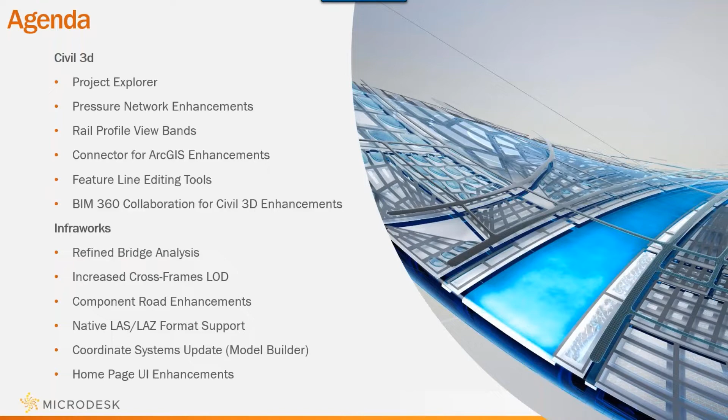Let's start by taking a look at some of the new features and enhancements that have been added to Civil 3D.

The first one is the addition of Project Explorer. This is a new tool that was added and is currently available to all AEC Collection license owners. It allows you to view, manage, and edit your entire design in one cohesive window, making things very fast and easy, and allowing you to do things quickly that were very time consuming in the past. This makes navigating the data much easier.

So let's go ahead and take a look at the Project Explorer.

I have a standard simple file I've put together which contains a decent amount of data. There are some surfaces, some alignments, some corridors, things like that. I've also created this same model in InfraWorks, so as we look at some of these tools, we'll start getting familiar with this same project location.

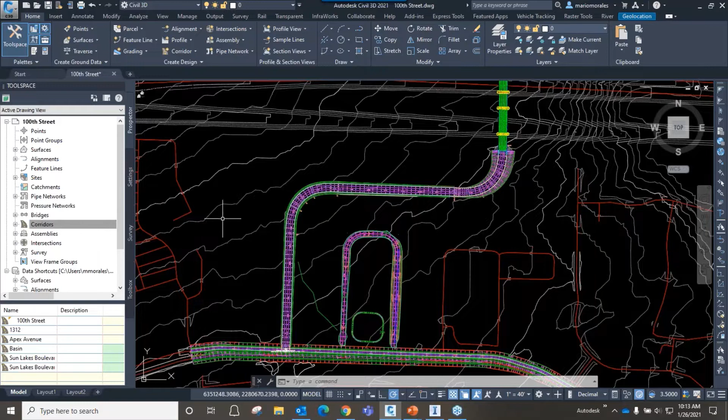To access the Project Explorer, you would go over to your Add-ins ribbon tab, and you'll find Project Explorer up here.

In here, there's quite a bit you can do, and you'll see that there are several tabs along the top of the window, and this is all completely customizable. You can go in and adjust your layout to choose the features you want to see and how you'd like to see them. Currently, I'm on the Alignments tab.

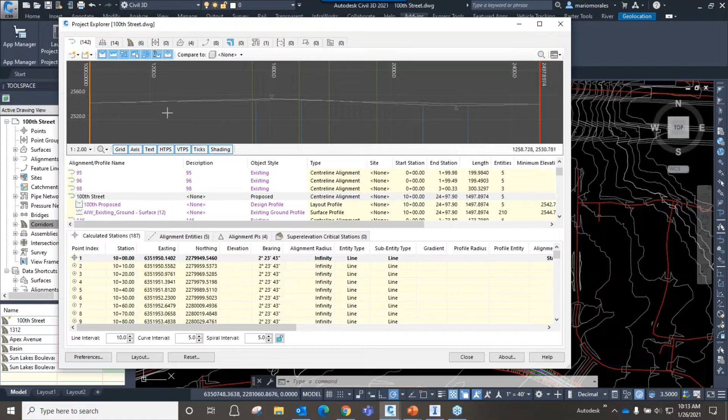As I sift through my alignment list, it will populate those alignments and show you horizontally and vertically. So when it talks about alignments, it's also talking about profiles.

You can control the features you're going to see in the window. I'm currently looking at this profile here. I can adjust my vertical exaggeration if it helps. I can also compare that alignment to other alignments in the file, doing profile overlays, if you will.

And I can quickly work my way through the various designs. There are tabs for lots of different categories.

I've also got some assemblies in this file. You can see those listed here. As you work through these, you'll start noticing the various properties that are available to you, so you can get to all the sub-assemblies and the properties that have been defined on those. As you can see, I've got lanes and sidewalks and things like that.

I can adjust property values without having to click each individual piece in my model space. This makes it really easy and convenient to get to all of these, change the code sets that have been assigned to it, the assembly types. If you want to change them to a rail or undefined, things like that, you can very quickly and easily make all those changes.

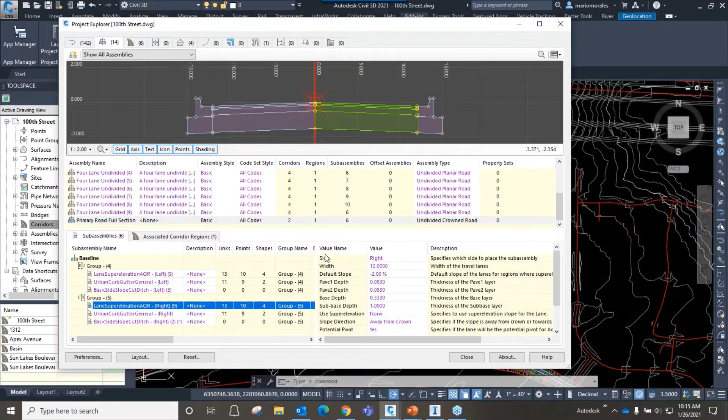When I switch over to corridors, again you'll see the corridors that are available to me here as well. I can adjust vertical exaggerations. You can navigate in these windows just as you do with your standard Civil 3D.

I can also come through and pick specific stations or work my way through the stations. I can turn on surfacing and compare the surfaces at any given location.

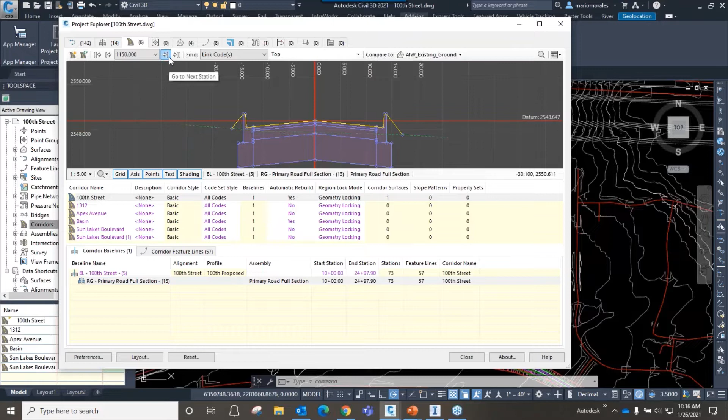All of this we see is completely customizable in the preferences, so I can go in and start adjusting vertical exaggeration, grid spacing, colors, things like that. There are lots of really cool things we can do in here that we can adjust and change. I don't have any point groups, but we also have support for those.

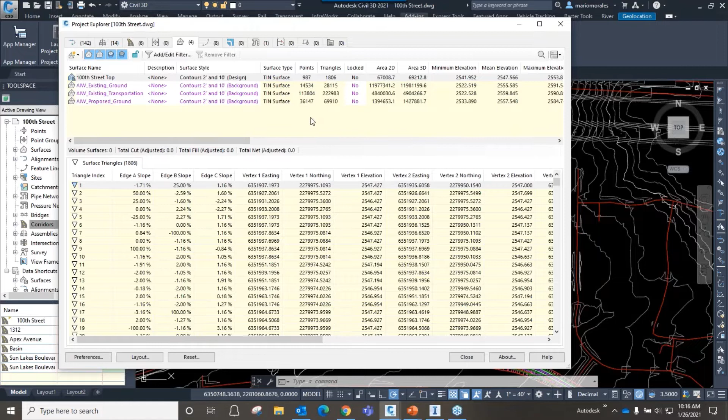And then we also have surfaces—you'll see all of the triangulation information and everything else. There's feature line support too, so you can run through the various feature lines that are in your file.

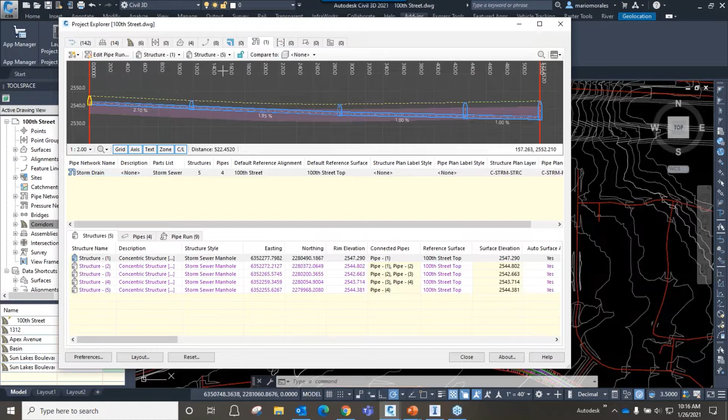I don't have any parcels in this file, but there's support for that as well. And then pipe networks—you can see I've got pipe networks here. I can look through the network however I see fit. I'm currently looking at this very small network from structure 1 to structure 5, but I can choose what I'd like to see.

I can even edit the design here too. All of these buttons along the top have the ability to create as well, so this window can actually remain open. You can put it on a separate monitor, or you can work in your file. For example, I can come in and choose to create a new pipe network or create one from an object.

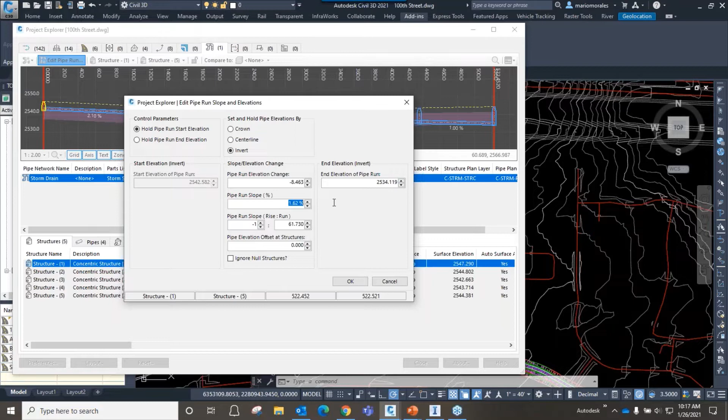Those tools are available on all those tabs. I can also choose to edit this pipe run. So if I went over and said edit pipe run, I can pull up all the information on this. Say, for example, I wanted the entire pipe run to be at 1%. I can do that, choose OK, and update the entire pipe network at one time without having to go in, select a pipe, open up the network editing tools, and then edit each pipe individually.

Again, I can come in and lock things, and I can compare them to surfacing. So lots of great features we can do in here.

We also have support for sample lines and AutoCAD blocks. And then the last tab is for your object sets.

In your object sets, I'll just make a quick one really fast. Let's say we're going to make one for the storm drain. You can choose what this object set does. It can generate reports of all different types: text, CSVs, HTMLs, PDFs. And then down at the bottom, you'll also notice I can create drawing files or tables in model space or paper space. So very quick and easy.

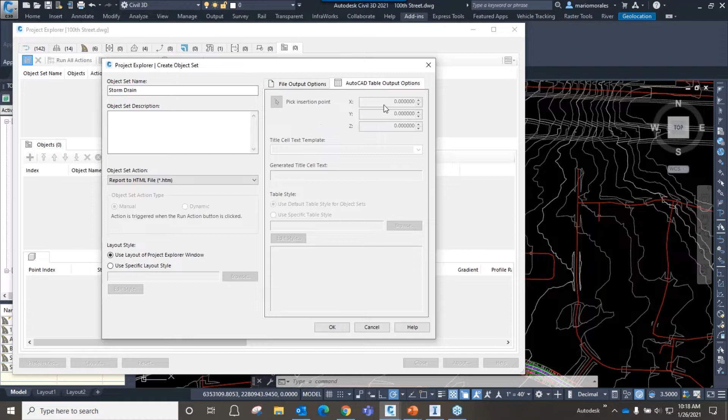So let's just say this is going to be an HTML report. It's giving me the options of how to format and set up the look, style, fonts, things like that for this report. If I was doing a table-based one, then I could pick my insertion points and things like that. I'll go ahead and choose OK.

Now this set has been created, and now I can just add what I want into this. For example, if I wanted to come in and add the storm drain, all that information is in there. So very quick and easy to do so.

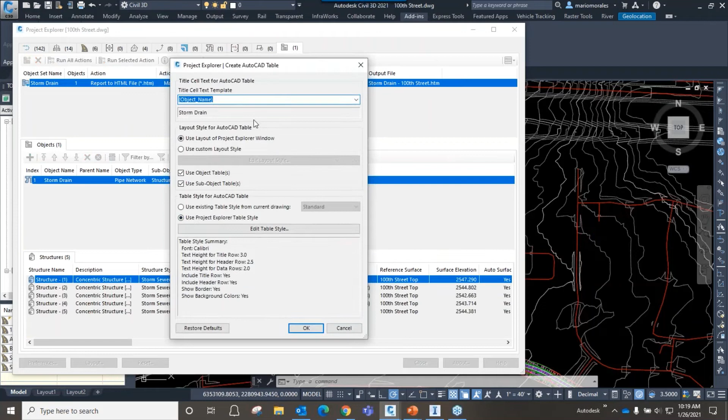Again, if I wanted to, I could also come in, and even though I did it as a report, I can still say generate a table. Go ahead and call this storm drain as well. I'll leave the default fonts and heights and styles just as they are. Choose OK.

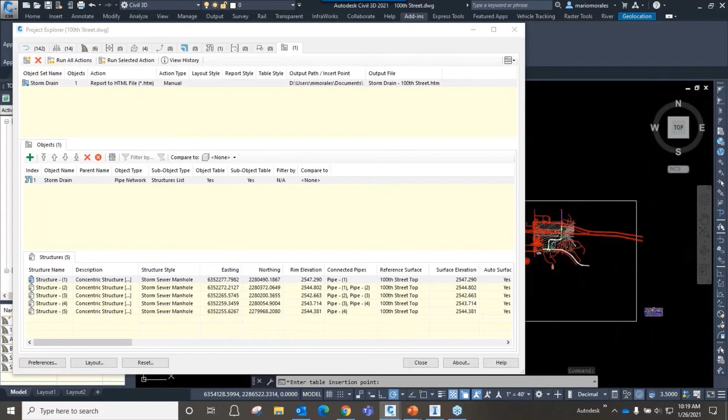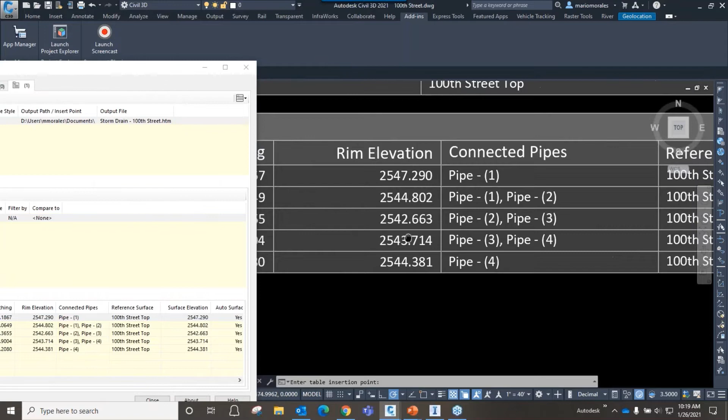If you look down below, you can see my application is still interactive with me. It's asking for a location for this table. I can just go out and place it somewhere off to the side. You can see how it's generated this. I had it put in all the information, so I'm getting a little bit of everything, a little overkill, but you kind of get the gist of that.

The nice thing about these is they're all dynamic, whether they're in model space or paper space or whatever, it doesn't matter. If your design changes, the tables will update as well. So definitely a nice little tool that we've seen, and it's made things a lot easier to access the various information.

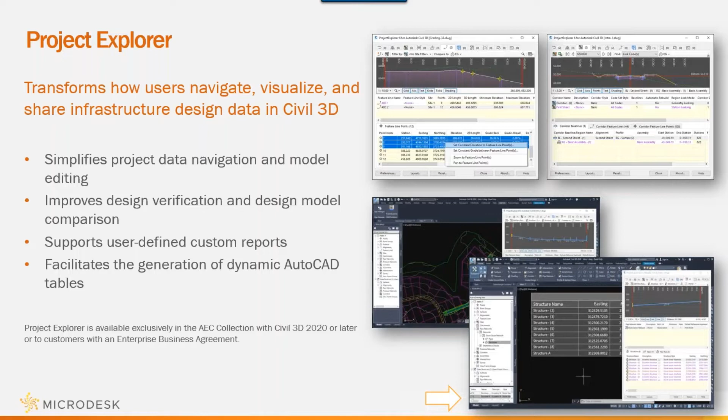Pressure pipe networks have had quite a few updates as well, including the new snap to pipe intelligence. This allows you to just click on a pipe as you're creating a new pipe run, and it will automatically determine the tee sizes that are needed and pick that from the catalog and place it for you without you having to choose it from the drop-down list.

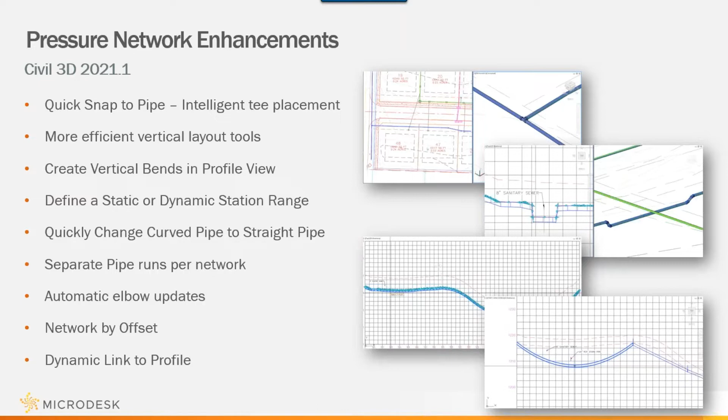We also have new enhancements to the vertical layouts, the new vertical bends in profiles, as well as creating dynamic station and static station ranges. Quickly converting pipes from straight to curve and back again, creating separate pipe runs per line, which is really nice, all within the same network. Automatic elbow updates, so as you click and drag a pipe network in your model space, it will automatically figure out which pipe fitting needs to be put in place and switch those out for you. Also automatic network offset creation and dynamic linking to the profile.

When we're working now with the tools, you'll see there's been some enhancements to the compass that was previously in there. It definitely makes life a lot easier and more functional to get those exact fittings you need. As you start drawing, if you snap over a pipe, it will automatically calculate the sizes of the tees and bends.

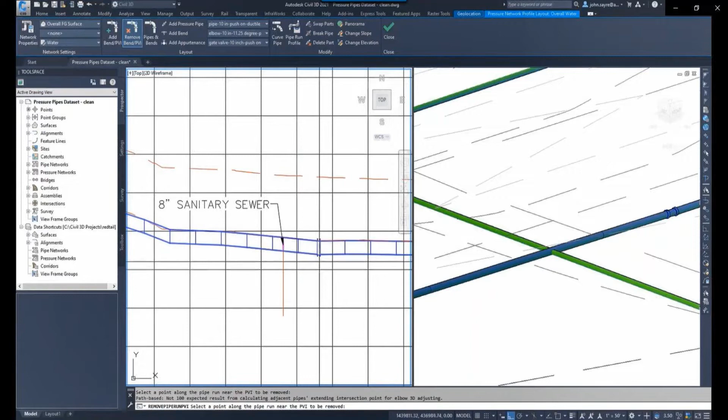You can also now add bends to the profile view very easily by just clicking, and wherever you click it will place the bend you need. Then you can alter your design, and as you move things around, it will figure out what vertical elbow is required for the change you've made and automatically swap that out, so your design updates quickly and easily. You can also click and move them around, or click and delete them just as fast. It's really intuitive and saves a lot of steps in modifying your design.

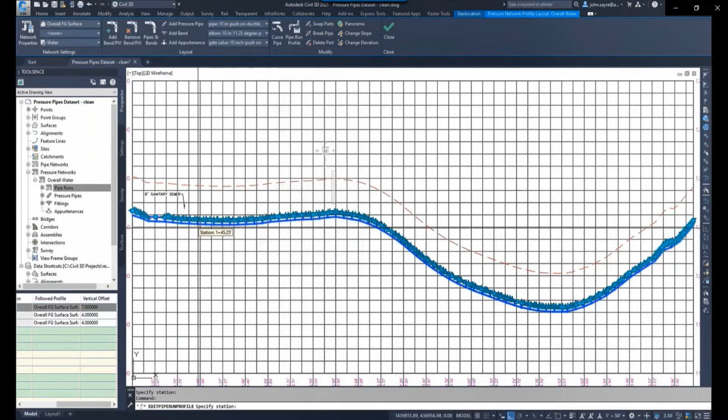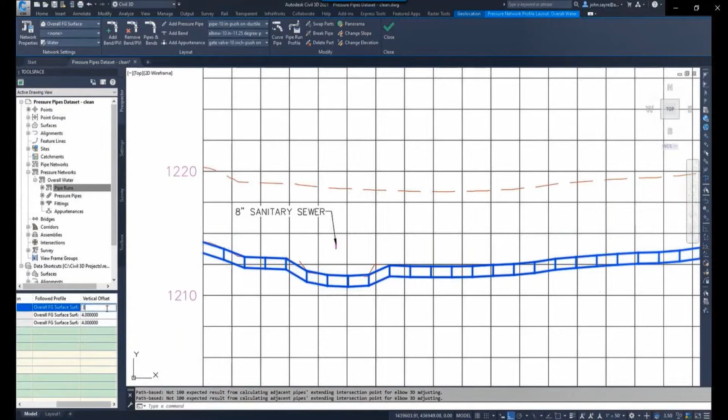Another really cool feature is being able to adjust your pipe runs and put in dynamic and static station ranges. So if you have a portion of your design you're trying to hold, or a utility conflict where they're hitting each other, you can define a station range and hold that. Then as you alter your design or update the depth dynamically to the surface it's referencing, those portions of the pipe will automatically stay that way. You also have the ability, by simply grabbing and pulling, to convert straight pipes to curved pipes vertically, and then drag them right back to bring them back to straight pipes again. Lots of really cool features.

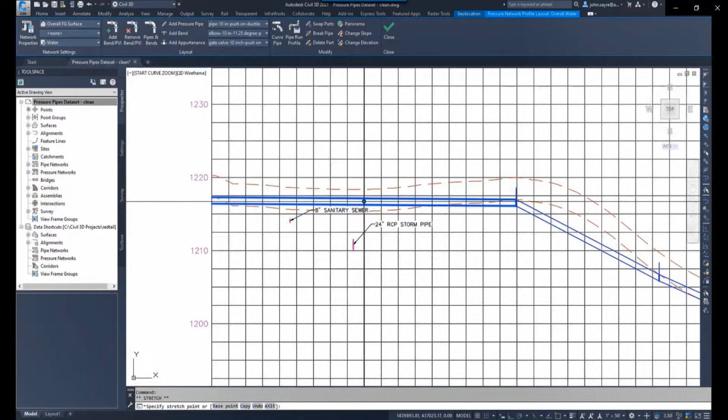Let me also jump over and show you the vertical offset feature. This one seems simple, but I'm really excited about it, I've found it really useful. For example, if I wanted to put some water system in here parallel to this alignment, I can now simply say create a pipe pressure network from an object, and then pick, for example, pick my alignment.

I won't bother giving it names and everything else right now, but I'm going to say this is going to reference the street top and that alignment. Here's the new field I'm referring to: this is your vertical offset. So if I wanted to go to the left, that would be a negative. I'll say let's go to the left 6 feet with 3 feet of cover. Go ahead and choose OK.

You can see how it quickly made a pipe network for me very easily, without me even having to draw anything or create an offset and then convert it from the offset polyline. It just dropped it in there very easily. Now we have a new pressure network in here, and they're now divided by runs, so we can make as many different runs all within the same network as we need to, which is really cool.

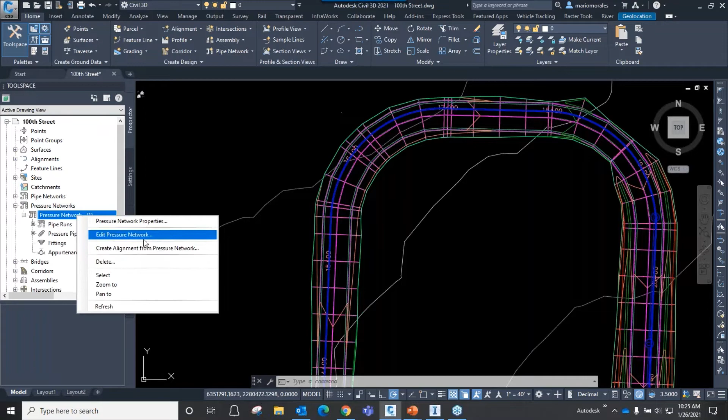If we go ahead and select that network and draw it on this profile here, again it remains dynamically linked to the properties you've provided. So if you make a design change, you'll notice the utilities update as well. It constantly maintains that design, which is really cool. Of course, to make this work, you want to make sure your corridor and surfacing are all set to automatic rebuild.

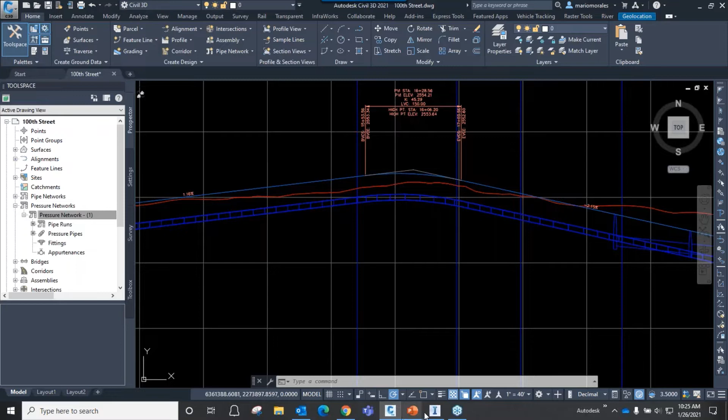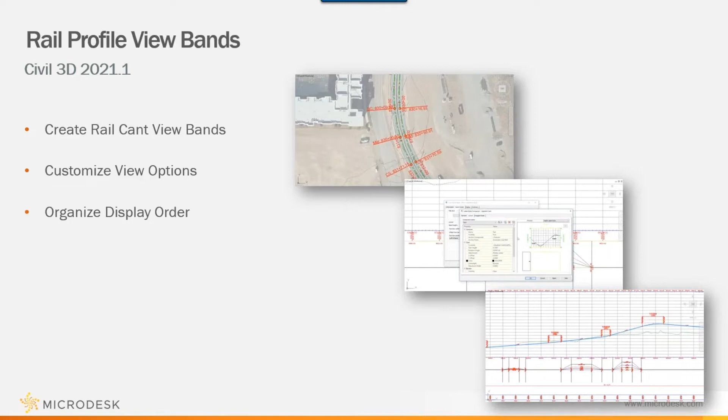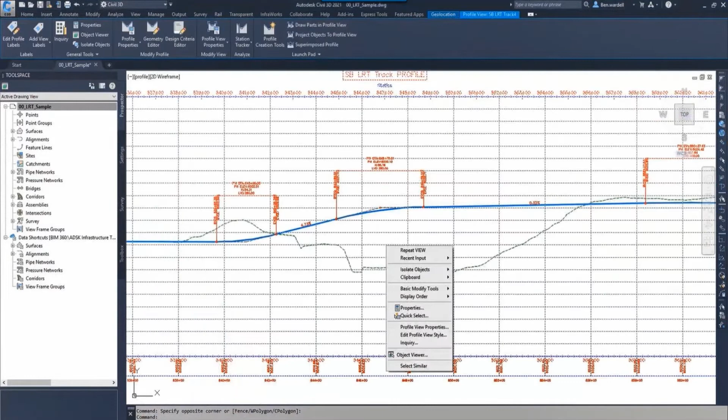Autodesk has also added new support for adding rail profile view bands, which is pretty nice, didn't exist previously in previous versions. A lot of these features are based upon the subversions of 2021.1. So you can very easily grab cant values, or super elevated values if you will, for rail alignments. Then when you go to your profile views, you can come in and add cant data tables, cant data bands to your profile view. You can then view things like your left rail, your right rail, center line, as well as your equilibrium, with your default value.

You can then come in and modify these to suit your needs. So if you wanted to adjust the appearance of these, change the way they're being displayed, the fonts, the vertical exaggeration if you will, band heights — all of that can be adjusted very easily.

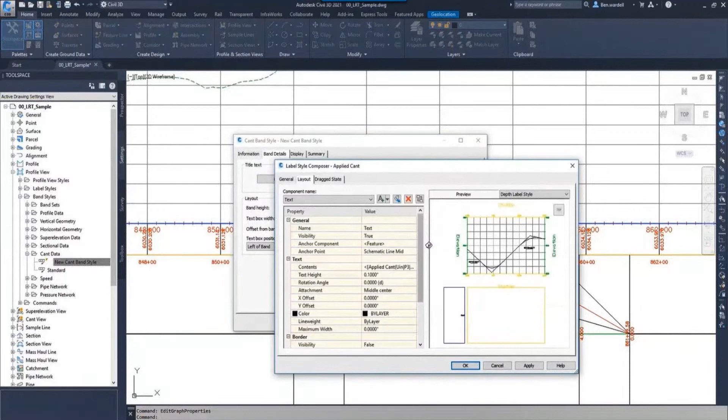You can also go ahead and create your own custom ones and then swap those out as well. And if you wanted to, you could even put in additional data or even hard code your own static information so that it annotates it the way you'd like to see it. So for example, if you wanted an equilibrium plotted on the data band, you could put that in there.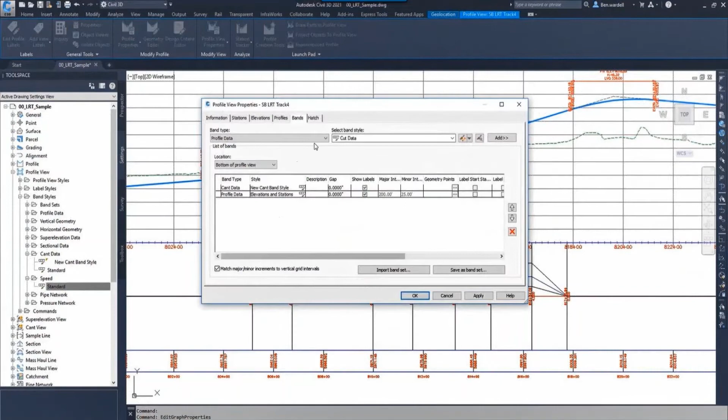It would show that on the view band as well. You also have the ability to add speed bands, which is nice. So if you add speed bands to the rails, you'll be able to manipulate and adjust those. And in there, you can also add things like speeds, dimensions, additional text, stuff like that. It makes things really nice and easy for people that are doing rail design.

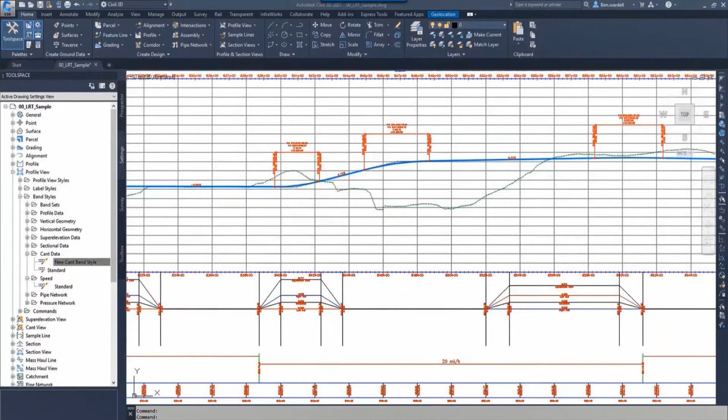The connector for ArcGIS has been enhanced as well. The new features in here now include things like curve support, editing ArcGIS data directly within Civil 3D, as well as creating your own new features.

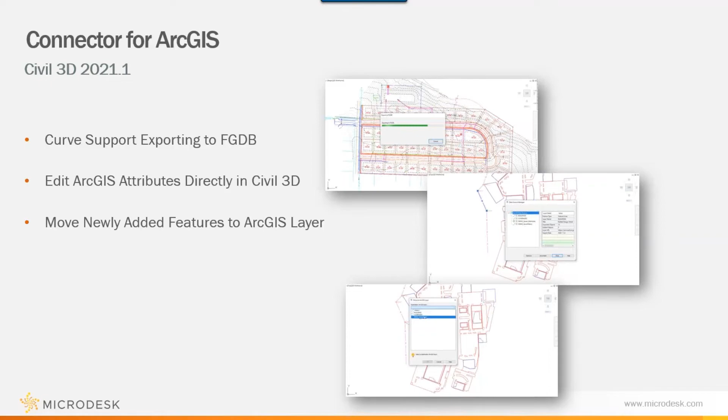In previous releases, whenever you drew a curve in Civil 3D and then exported it out to ArcGIS, it would be segmented lines. But you'll see now, whenever you do that, and then open that up in ArcGIS Online, you'll see that true curves are now supported, making your design data much more accurate.

You also have the ability to edit ArcGIS extended attributes. So when you select their data, you'll be able to go in, make changes as you see fit. And then as you do a save back, it will take the information and the changes that you've provided, save those back. And then again, once you view those in ArcGIS, you'll see that the changes you've made have now been updated in ArcGIS.

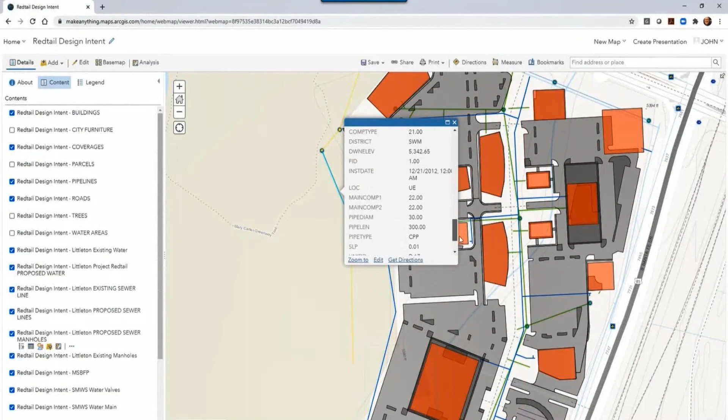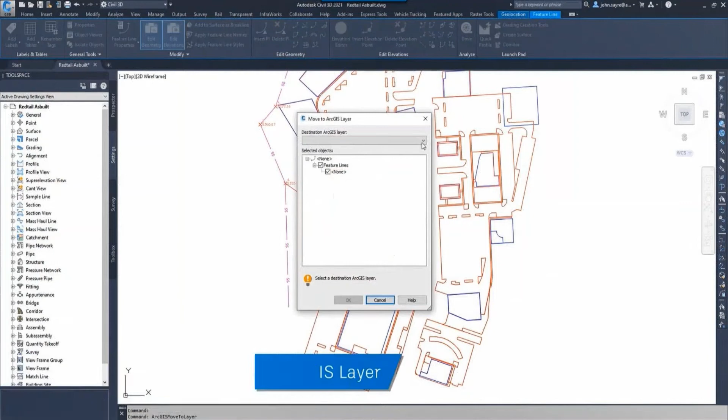And then along with that, you also have the ability to create your own data. So if you're drawing, for example, a feature line, you can create that feature line and then move that feature line onto an ArcGIS layer. And once you do that, it will take on all the extended attributes that are assigned to that layer as well. So now your simple feature line in your standard properties palette

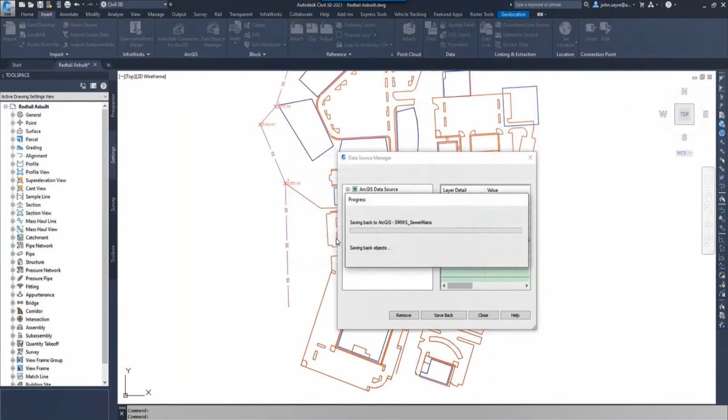Is going to have all the additional data. So again, you can then populate the necessary information that you like, and then perform a save back again. And when you do a save back and then open that up in ArcGIS, you'll see that your newly designed information is now also included in ArcGIS. So it's a handy little tool, handy little feature. And this also works with ArcGIS Enterprise. So great little feature.

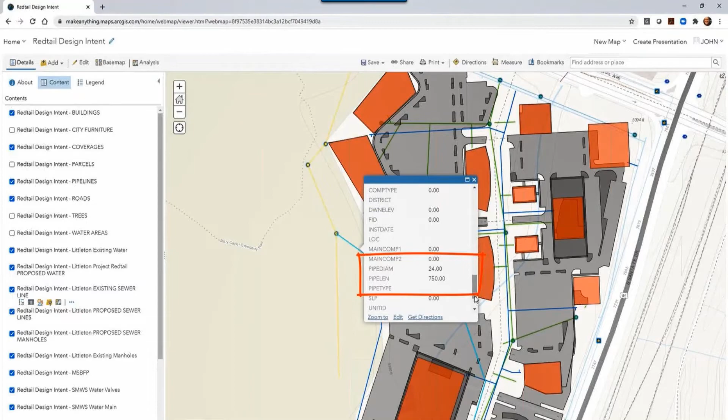Feature line editing has been updated. There's a couple new tools, but I find them very useful, very beneficial. So some of the new tools that they've added are the set corridor baseline elevation by reference, set grades across multiple feature lines, and insert points at crossings. So let's take a look at a couple of those.

So I happen to have a corridor here, and this is a corridor generated by a feature line, not necessarily an alignment. And so if I hover on that, you can see there's a corridor and a feature line. If I select that feature line, I can manipulate the design, and my contextual ribbon tab is going to open up. And then on the elevations panel, you'll see that there's a new button called Set Corridor Baseline Elevation by Reference. So I'll go ahead and select that.

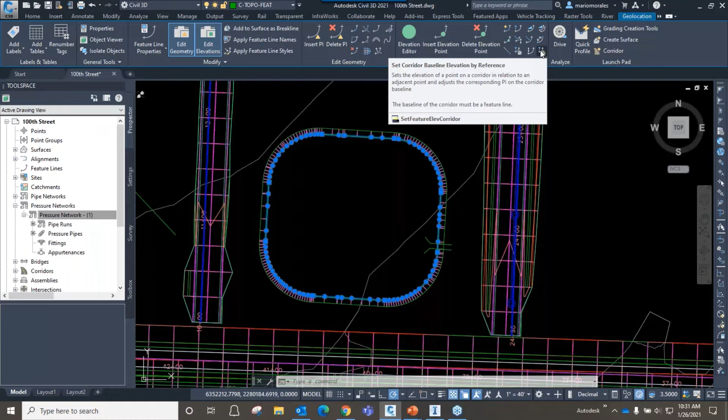It asks me to select a reference point. So maybe I want it to be referencing my corridor over here. So I'll just pick a random endpoint right over here. And I'll specify a point on my corridor. Now I can snap to a specific vertice, or I can even just do a nearest, if you will. And if I do that, it'll even tell me, well, you don't have a vertice right there. Would you like to insert one at that point? Yes, I would. And then what grade would I like that to be? Let's go at negative 2%. You can see that new vertice has been added.

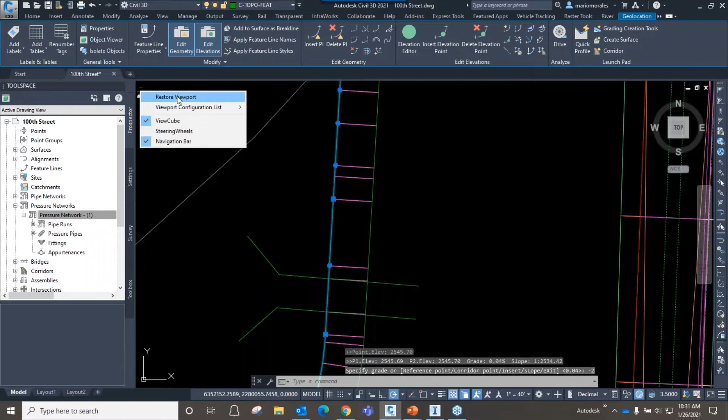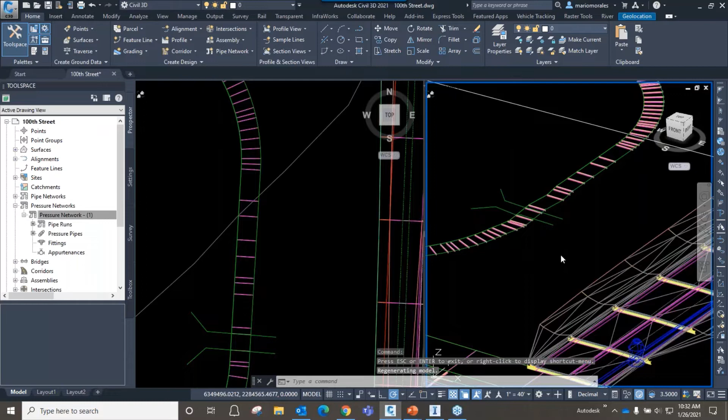I was going to go ahead and split my screen. We'll orbit this around a little bit. We'll take a look at it. And this was pretty constantly flat. It was basically draped on the topo, which was very flat at the time. And so you can see now how that little update I did, because it showed me a default slope at the time of 0.04%. And you can see it's now set at a 2%. So you'll see a little divot in the design there.

I'll even do it one more time so we can see how that works live in action. Go ahead and pick a point here, and I'll pick an endpoint there, to a nearest point there. I'll insert, and we'll say -4%. You can see how that design updates down below. And then you can go into your elevation editor, and all those additional points have been added and adjusted there. So, great little tool.

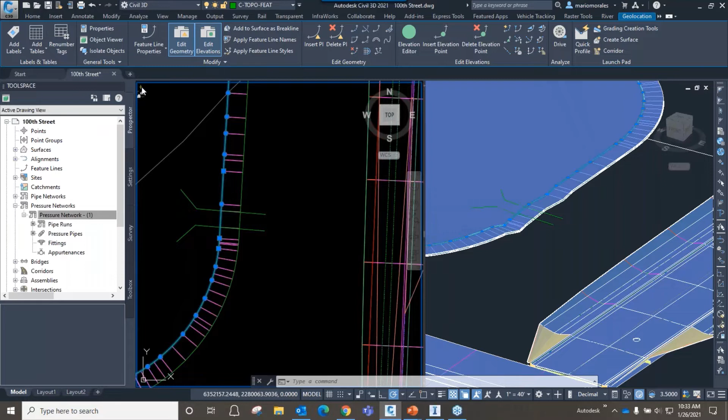Another great little tool they've added is the insert points. Let's grab this feature line, just draped, and in here we can edit this. It's in a bit of a weird location because you can actually insert these points as geometry points or elevation points within the tool. For our purposes, I'm going to choose insert points at crossing locations. It's going to ask me if I want an elevation point or a PI point - let's do an elevation point.

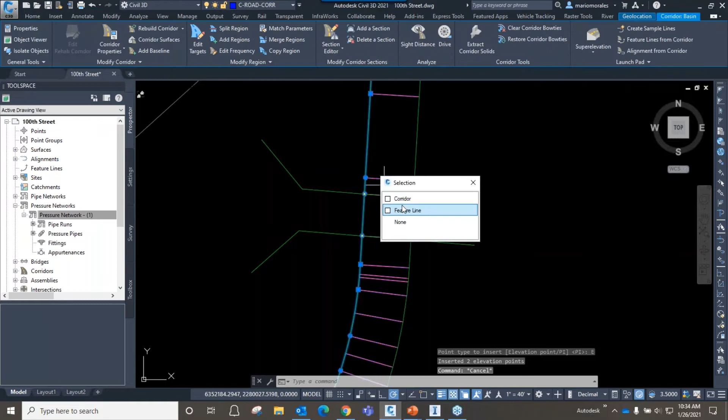You can see a new point has been added right there, and it's not only added to the one, but it's actually added to both. Now you can see the additional points that are right there. And if I also select the feature line there, you can see the points have been added there as well. Everywhere those points are crossing each other, you no longer have to insert those points manually or go through a big headache of editing them to match the elevations you'd like. As you change one, it's going to change the other. Great little feature.

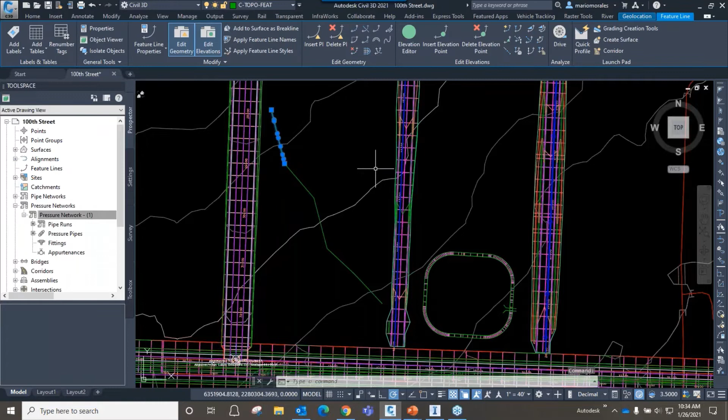And then lastly, the new tool of being able to set the slope across feature lines. We could do this before, but they've enhanced this tool so it actually updates any and all feature lines within the file without you having to join them, which is really nice. If I go ahead and choose that tool, you'll see it highlights all the vertex points in all the feature lines within the file, even though I only selected a very small segmented feature line. I have several, I think 5 or 6 feature lines in here.

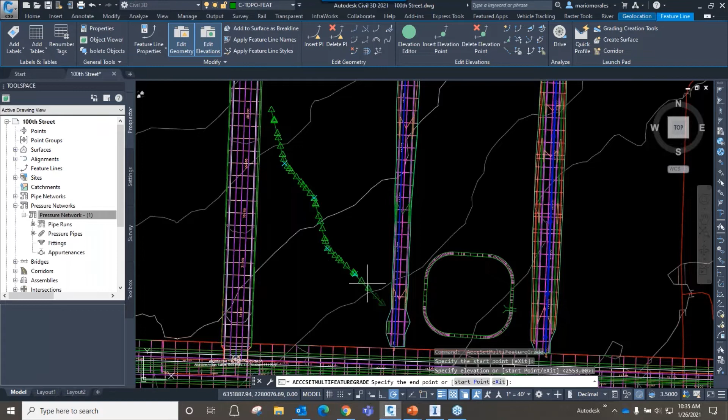I can pick my start point, and then I can trace not only along the feature line I selected, but along any feature lines in the file, and get it anywhere I want, maybe up to right about there. We're going to say this is going to be at -1%. And then if I look at it in the elevation editor, the entire thing's been edited across all feature lines to -1%, with the exception of the one I stopped halfway through - it's 1% up until the existing elevations that were already there. So definitely a time saver without having to merge all those things together again.

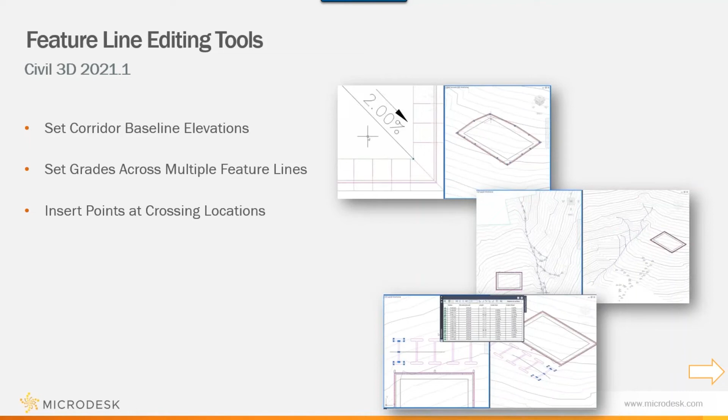Also, the BIM collaboration has been updated in Civil 3D. You'll notice there's different functionalities on the front page, including different ways of viewing and sorting available information, and additional file support. So as you're referencing other file types, it will automatically store those with your files. So if you have sheet sets, very large surfaces generating MMS files, or even reference templates, you'll be able to do that as well.

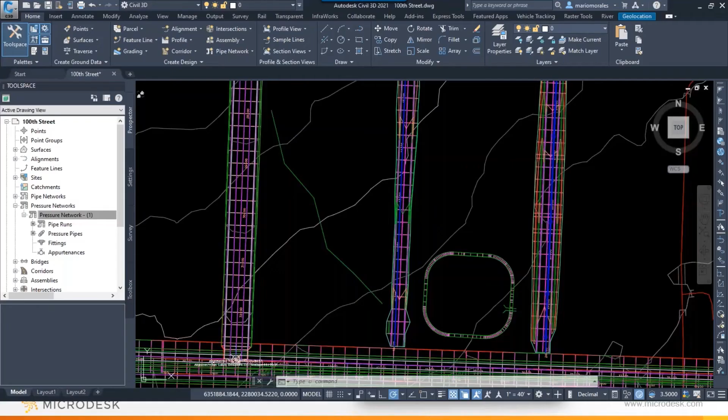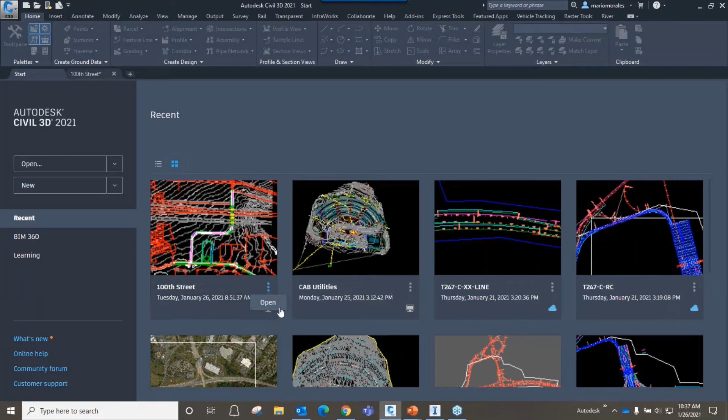If you go back to your home page, you'll notice we have our thumbnail view as well as our detail view. You'll be able to look at the file type, whether it's a cloud file or stored locally, and when it was worked on last. You can choose to work on those and open them, as well as see the file types. In the thumbnail views, you'll get the little icon imagery, and any file that's been locked will be displayed with a lock as well. You can choose to open or download those, and they'll all appear on your recent list. If I go to my BIM 360, that gets me to my project, so all your projects will be available to you in here.

Let's take a second to populate. So we have our different file types, whether it's been synchronized, how many versions are in there. Again, I can manipulate and sort by various information, like which files are locked, who locked them, when they were published to 360, things like that. So it's a lot more information available in there. I can go to my thumbnails, get to all my folder structures, as well as get to all my various projects, as you saw. So lots of great enhancements on there. And as I said, it's also going to publish all of your MMS files, your reference templates, and your sheet sets, which is nice.

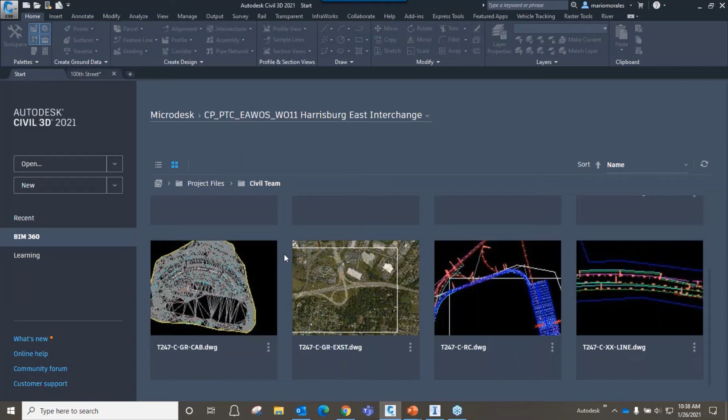Now let's take a look at some of the new features that have been included in Infraworks.

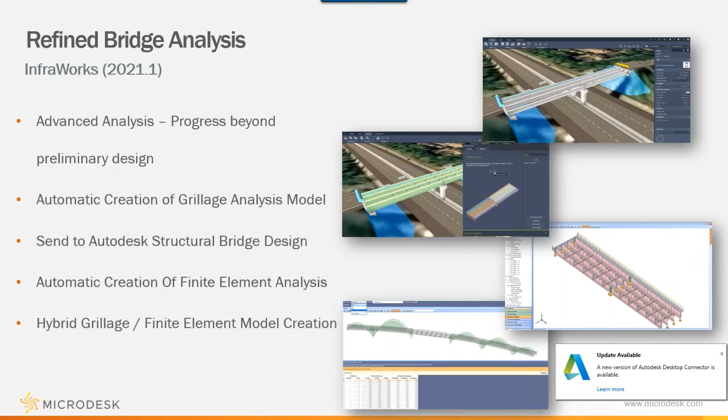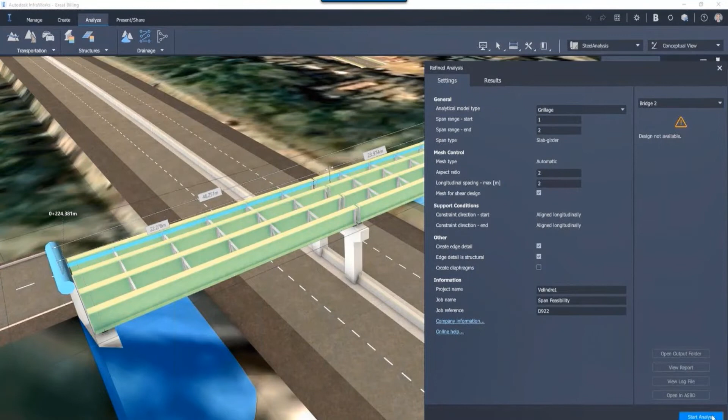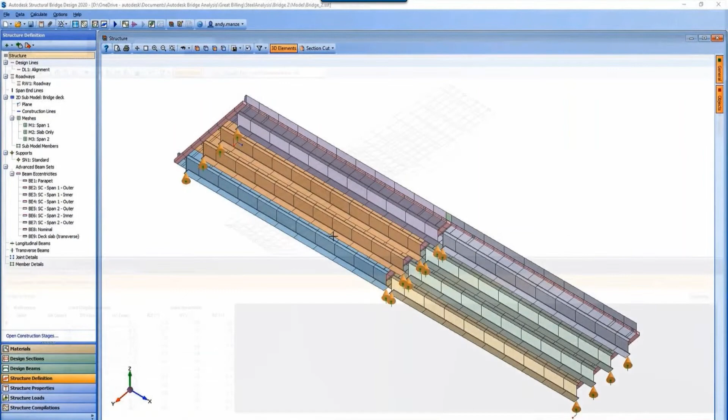So the new refined bridge analysis tool is a great little tool to help assist in your preliminary as well as your advanced design. It has different tools like creating grillage analysis, finite element analysis, as well as hybrids. So any bridge that you create in Infraworks, you'll have the ability to select that bridge and run an analysis on there. Say you wanted to do a grillage analysis, you can do that and it'll process in a cloud-based environment. Once it's done processing, you'll be able to view the results in that same window, so you can look through and see how things turned out. Then you can even choose to open up Autodesk Structural Bridge Design, where it will import that bridge, and you'll be able to review everything, analyze everything, and continue your design, analyzing loads as well as your structural information.

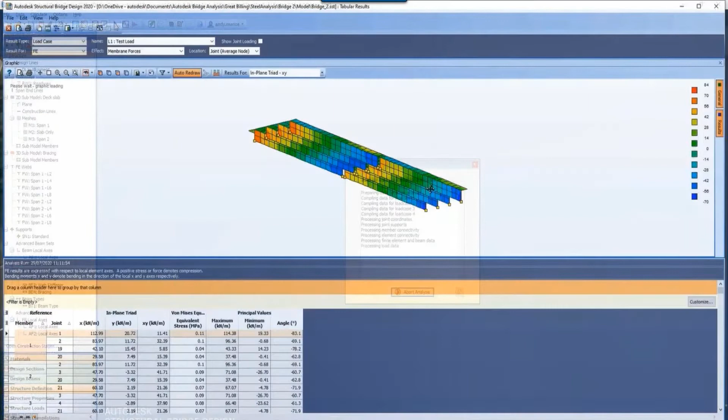You can also do finite element analysis, basically using the same process, just choosing a different option. What it's going to do is bring in all of those finite details, like the various framings and things like that, and when that comes in, you'll also be getting the load data and information for that. Finally, you can choose to do a hybrid of the two, where it's going to take all of that information for the entire bridge and bring in the structural as well as the finite details. That makes it really convenient because now you've got the entire bridge from the large elements to the small ones, all in one cohesive bridge model that can be reviewed and further designed in Structural Bridge Design.

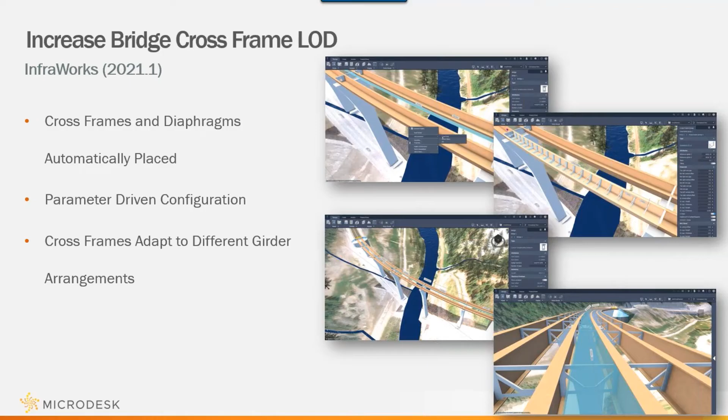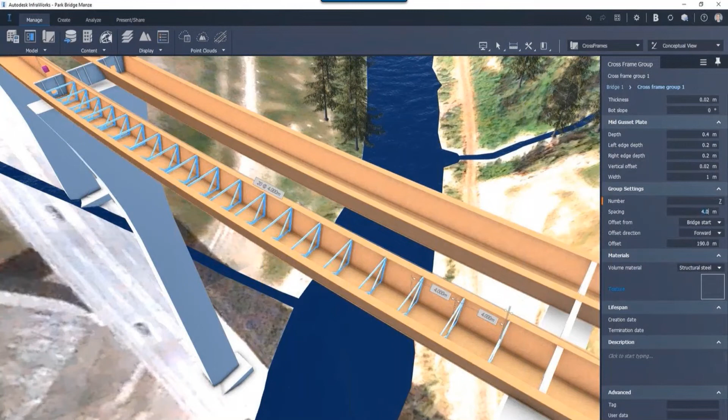Another great feature they've added is the cross-frame and diaphragm generators, and this is parametrically driven. One of the cool things about it is it absorbs information from your bridge model, so from your girders and things, it's going to pull dimensions and orientation from the girders as well. All you need to do is simply grab it and select to add cross frames, and it'll generate a default layout. But again, it's a parametric design that you can change at any given time, so you can alter the number of frames, the spacings, the offsets, and it's going to dynamically update so that it's ever changing with your design. Very nice, very easy, and you can imagine the amount of effort it would have taken to manually create those frames and edit them if your design changes. Definitely a nice time saver.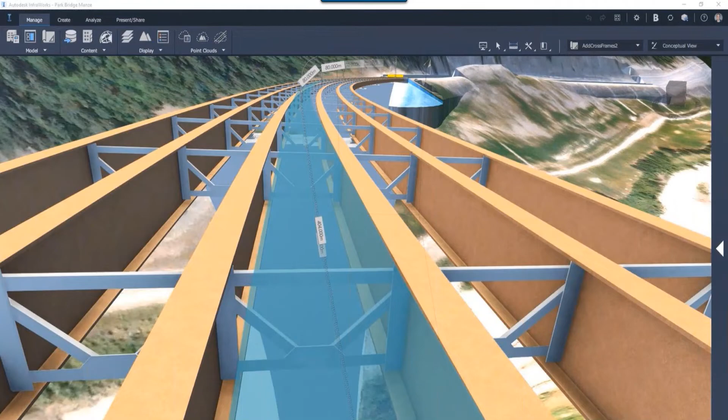Component roads have gotten some updates as well. They've added some abilities and additional functionalities when importing corridors from Civil 3D, also viewing the corridor property information as well as editing that, and manipulating the road striping and lane markings. Let's take a quick look at some of that stuff.

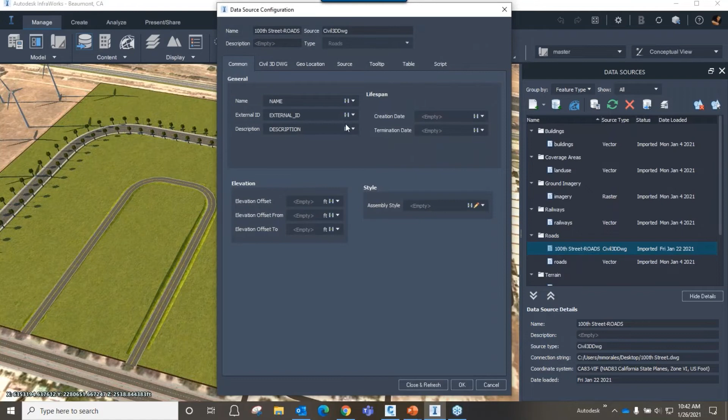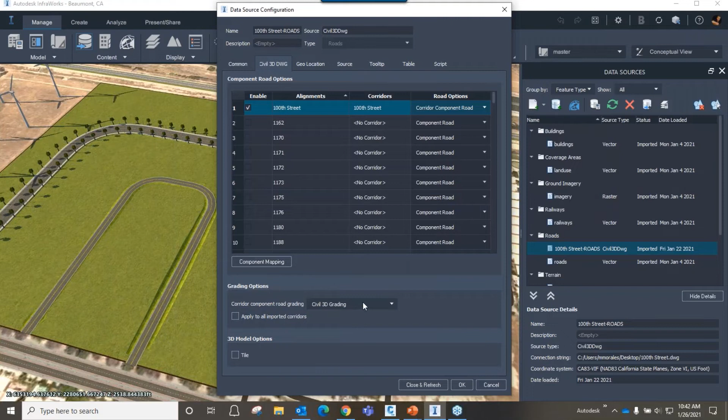So here I have that same model laid out here. I laid this road out in Infraworks, and this corridor in Civil 3D, so we have one of each, that way we can look at both. If I go ahead and look at the configuration of that road, you'll see that when you bring your corridors in now, you get this Civil 3D drawing tab. In here, you can choose which alignments, which corridors, and things you're going to be bringing in, not just the entire thing. You can choose whether they're component roads or corridor component roads. And then you can also control how it's going to manage the grading off to the side: use the grading that comes from Civil 3D, don't grade it, or use Infraworks grading.

You also have the ability to come into your component mapping. From here, you'll be able to see your subassemblies, links, and shapes, which ones are being used, and which materials are assigned to each. So lane 1 is using a shape code of pave1, in the roadway category, and you can now choose what type of material is going to be displayed on those shapes, which is really nice.

You can also choose to create your own additional ones and choose the properties you'd like for those. You can even drill this down by corridor to make it a much cleaner, simpler file to look at. You can also look at the linking for the surfaces, so which links are used for generating the top surface as well as the datum surface. It's a lot easier and definitely more customizable, so when you bring in the corridor, it looks exactly the way you want without having to do a bunch of edits afterwards.

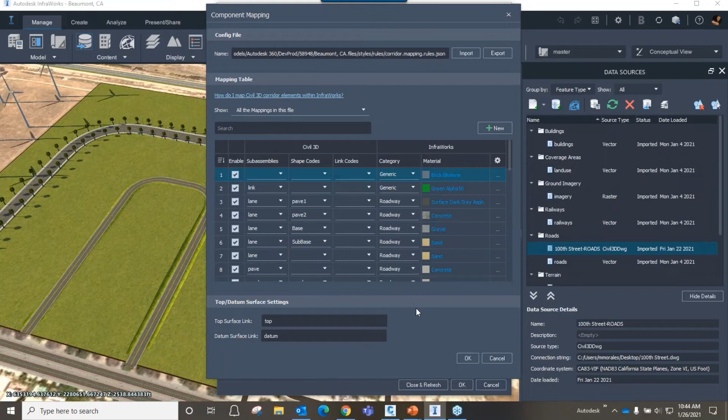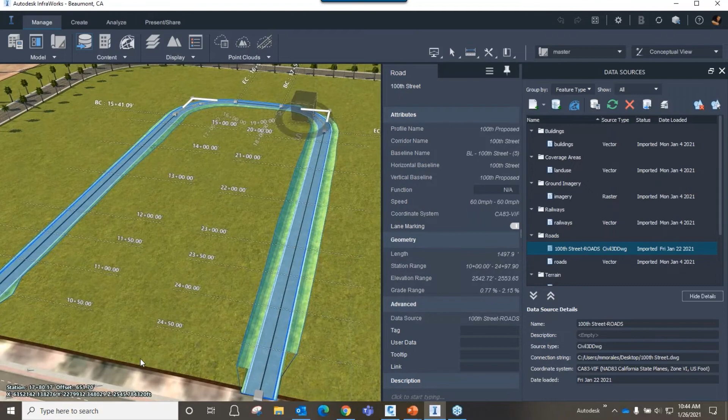The striping can very easily be customized as well. Now when you select a component road, it doesn't matter if it's a Civil 3D corridor or an Infraworks road. Let's do one that hasn't been altered - let's come over here. This one has your out-of-the-box static striping.

Now you can right-click and adjust the pavement markings, which brings up a window for what's happening in any location. I can choose the color or the material patterns, bring up any color I choose. And then I can also choose my line types.

I think the meeting is slowing down my software. Give that a second to update.

The line types are really really cool, because prior to that, you couldn't really do a whole lot with those. You could go to your style palette and add a constant line or a dash line, or maybe change the color and things like that, but you couldn't really group them and do quite a bit more with them.

Now you can come in and choose the different line types that are going to be assigned to this. The meeting is slowing my application down just a little bit, so bear with me, I apologize for that. As you can see, it's very easy to make changes to any and all of the line types that come in from that road. I just did the one center line, but as you can see, it's very customizable now.

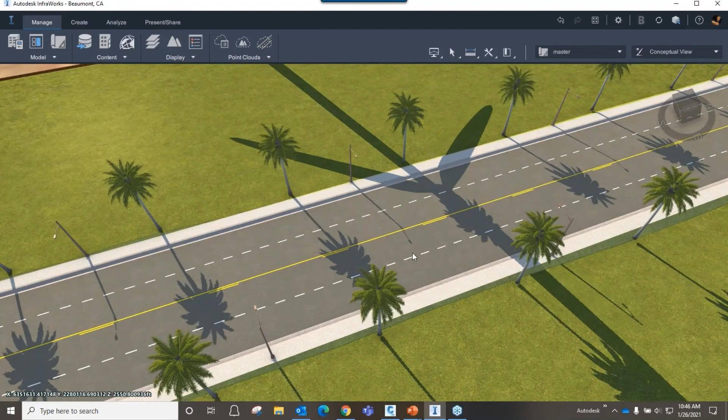When it comes to intersections, we can now control the pavement markings. For example, if I click on this one, you'll notice how the pavement marking properties come right up. If I wanted to, I could say this is a through road only, no left turn, and update those markings.

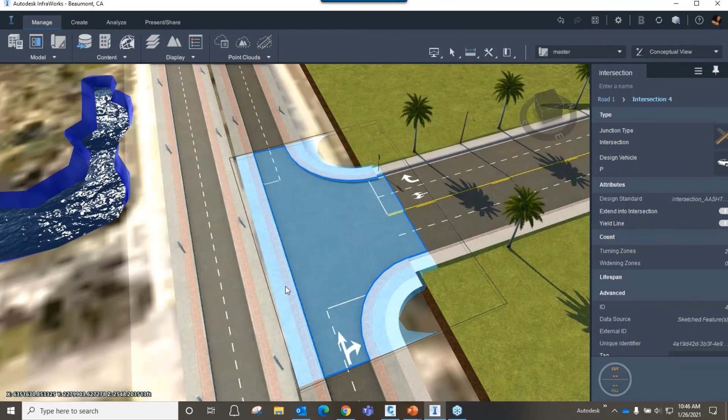I can also just click and turn off the pavement marking altogether, so that it's not even there. This makes it really handy to be able to get these to look exactly the way you want and get the markings that you like without letting the software determine that for you.

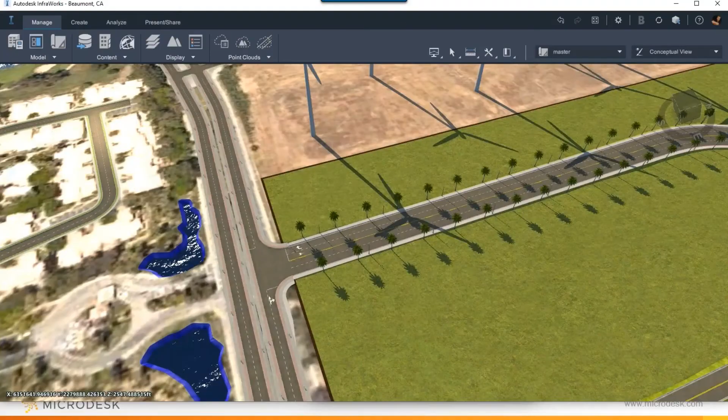Another nice feature they've added is the ability to bring in native LAS and LAZ point cloud files. Prior to this, you always had to open your LAS or LAZ files in Autodesk Recap, create a project, and then save them out as a recap file. Now we can come into our data sources and choose to bring in a point cloud, and it still primarily uses the RCS, RCP files, but you can choose, for example, a LAS or LAZ file - I believe I have one here.

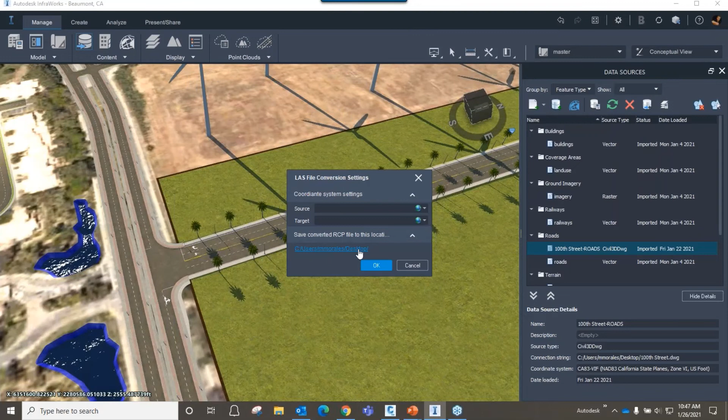It's still going to want to use the RCP, but what's nice is now you don't have to go through those extra steps. You can choose the source coordinate system and the target or destination coordinate system, and then it's going to convert that to an RCP file on the fly for you. By default it will put it in the same location as your LAS file, or you can browse to wherever you want to store it. In the end, you'll have an RCP file connected to your model, but at least you didn't have to go through the extra effort of doing that manually, which is really nice.

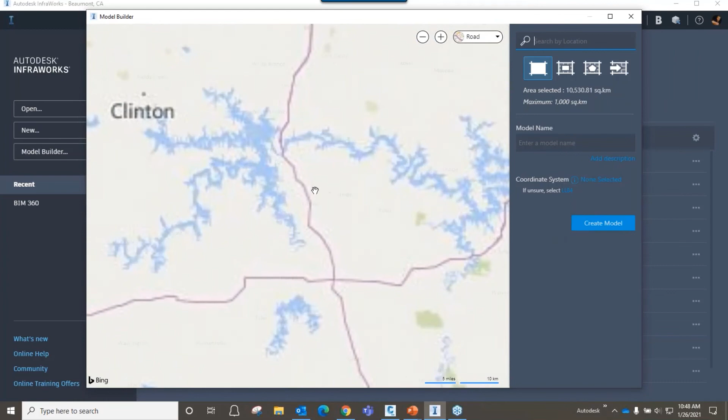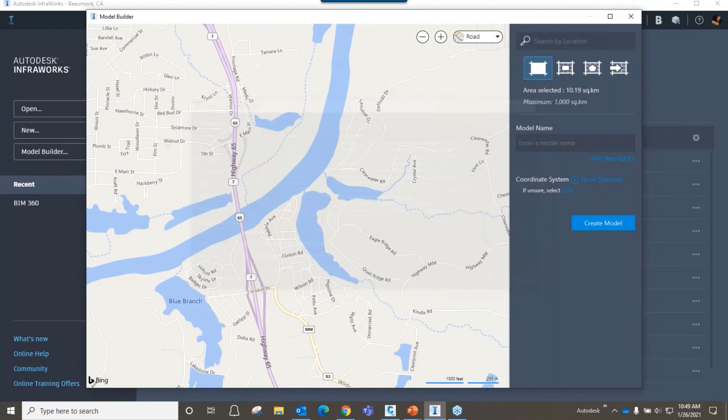Another really great feature that we've been asking for quite a while that was finally added to the software is the ability to manage coordinate systems in Model Builder. For those familiar with Infraworks, you probably know that whenever you went into Model Builder, it would automatically assign the LL84 coordinate system to any model you built. You had the ability to alter it afterwards, but now you can go in and say, this is my defined area, give it a name, and pick the coordinate system that's going to be assigned to it. Once you choose create model, after that model has been generated, it will be built in that new system, which is an awesome new feature.

Finally, some updates to the homepage UI. Much like Civil 3D, they've put that similar front end display on the welcome screen, with the ability to use detailed and tiled views, direct access to your BIM 360 models, as well as list your data. You can see that here. We can see which are local models and which are cloud models, ones that are in conflict of versions, manipulate the columns, look at the thumbnail views, and get to our BIM 360.

Once your BIM 360 connects, it's going to pull up all the various projects you're working on. You can switch them out for any other projects you might have, go into your project folders, and you'll see your versions and the model states. You can go through and manipulate the various columns that are in there, and if somebody's in those models, they'll be locked, and that will show as well. You'll have lots of access to the various data that's available to you very easily.